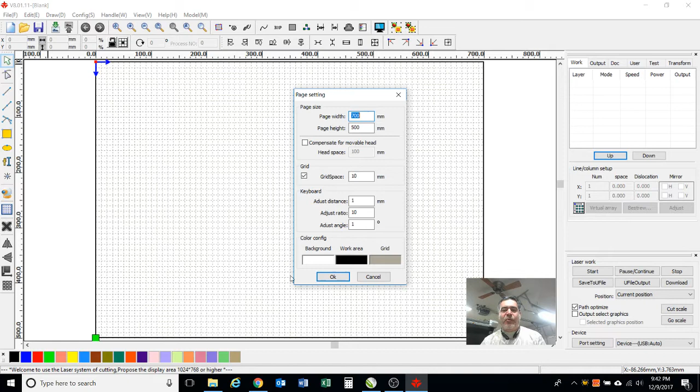Then we're going to go to file parameter settings. Here, DXF units, we're going to change those to inches, and we're going to change the unit type to inches as well. Click OK. Now I can see that the 700 wide is roughly...

What is that? A little bit more than 27 and a half, less than 27 and 3/4, so we're right in between there. My work, I don't see where I'll be using anything more than 24 inches wide, but at least I can set up parameters up to 27 and a half.

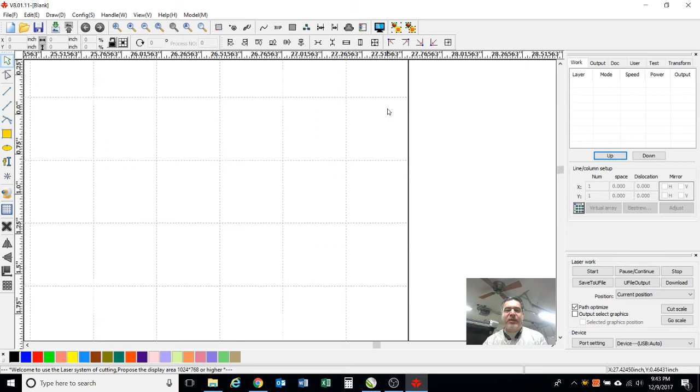Coming down here, all I'm doing is turning my little wheel on my mouse. So we're not quite at 19, not quite at 20, we're close to 19.75. Let's say 19 and a half, just to make things easy for us to work with.

Now this green box, that's when a unit or an item is done. I'm just going to draw a box right here. Let's say this is to cut out a piece of board, and it's going to start there, come down, across, up and over, and stop there once it's finished. That's good there, because then I can basically pull out my board from the front, and I'm not going to hit the laser head.

Now, I believe that's something I changed in the beginning. I think it's under system settings, and there's the laser head. If you put it in the center, when it's done doing its cut, it's going to go from here, corner, cut, cut, cut, cut, and then move there. Then you have to move the head out of the way in order to pull that board out.

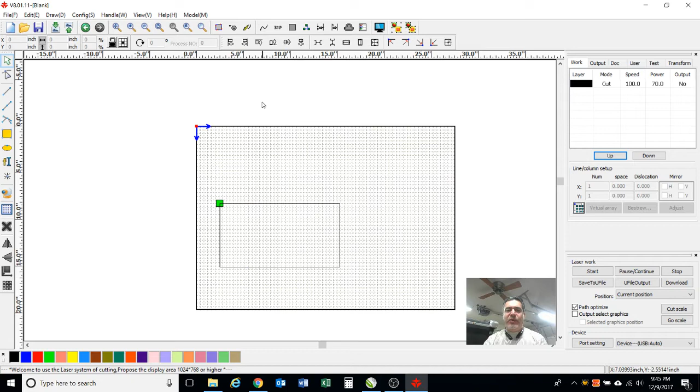So once you're done, it's good to have the head get out of the way so you can pull out your material. I'm going to put that back where I had it. So close—so basically we went from millimeters to inches. I gave you a little description of what this is, so now we're going to get rid of that.

Delete. Okay, now I'm going to show you some other pointers if you're going in from Corel to RDWorks. So we're in CorelDraw now, and what we're going to do is change a couple of items.

Right now it's telling me my board is 20 by 20, so let's go 27.5, and then we're basically 19 and a half. There, that is pretty much a view of our work area. Now this here is called the nudge factor—it's set real low, I'm going to do basically 1 inch.

And this is offsets. We're going to go to 0 to 0. Now basically that's the way I work with that particular setting.

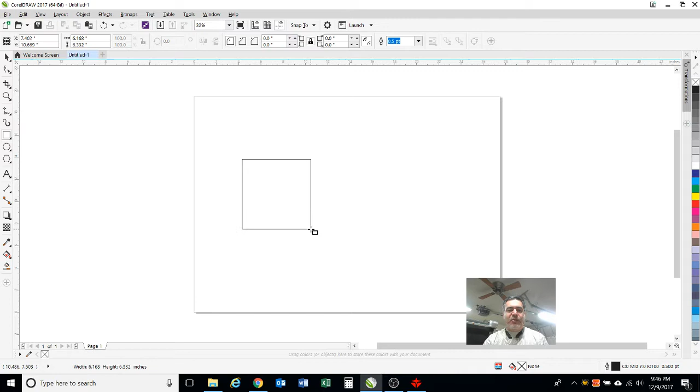Now we're going to do a box. Let's say you draw a box anywhere and it's here. If you hit P, that puts it in the center of your work area. Okay, we draw a circle, and actually that's an ellipse. I'm turning my wheel to zoom out a little bit, and I'm gonna hit P. So now we're in the center.

Now with the nudge factor that I did earlier, if I select an item, it moves over 1 inch, and there's another inch, and that makes it real easy to move stuff around. If you need one there, I'll hit Control D to duplicate, and that's 1 inch over, and that's another inch over. This comes in real handy when we're actually working with scaled items.

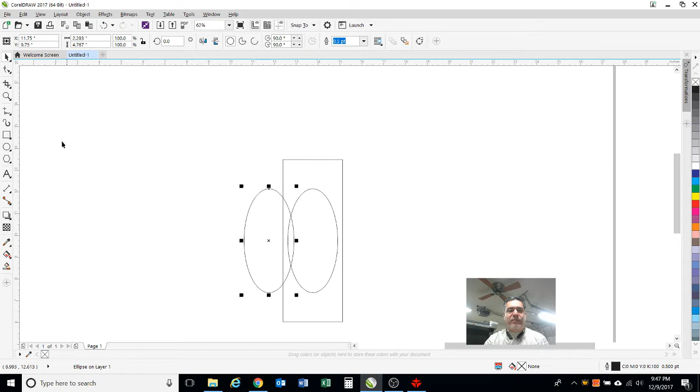So what I'm going to do now is get rid of that. I just left click, delete everything. We're going to create a box. If you hit your control button and your left button, that makes a perfectly square box. Now if I let go of the control button, I can make a rectangle. So I'm going to hit control, there we go.

Now let's say, for example, you can see where the numbers up here are changing while I move that around. That's actually telling me the size of that box. So you can see where it's changing. Let's go with a 2-inch box, and 2 again. I didn't have to hit both of them. I could have done it with just one, because this little lock is there. One can be 2 and the other one can be 3, and then I've got a rectangle.

So we're going to undo, and let's lock that in place. Now whatever I do here happens on the other one. So if I do a 3, it automatically does 3 on the other one. Okay, let's go back to a 2. We're going to go to 2, enter, and now we're off center of the page.

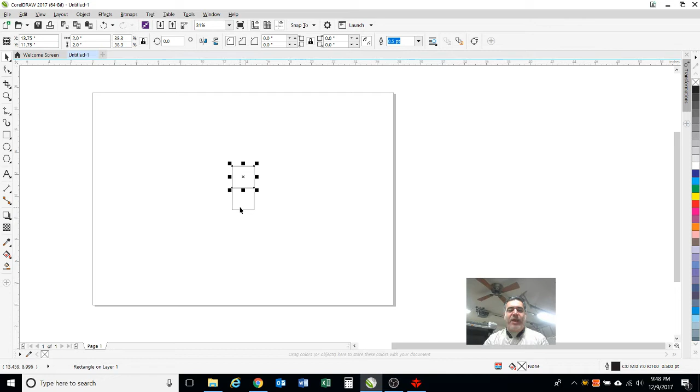So we're going to hit P, and there it is. With that 1 inch nudge factor, I'm going to select Control D and move up. That's halfway. Move up again. Now I'm just going to hit enter, and there we go. If we zoom in, we're perfectly aligned right on top of the edge of the other one.

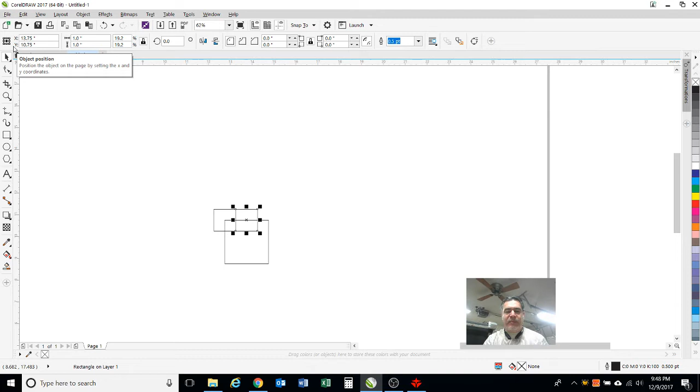So if we made that a 1 inch box, enter, hit P, move up and up, there. Now Control D, Control D, and we can move around and hit right where we need to be. Control D. That's just showing you some little steps for now, but the real thing I want to show you is the different boxes.

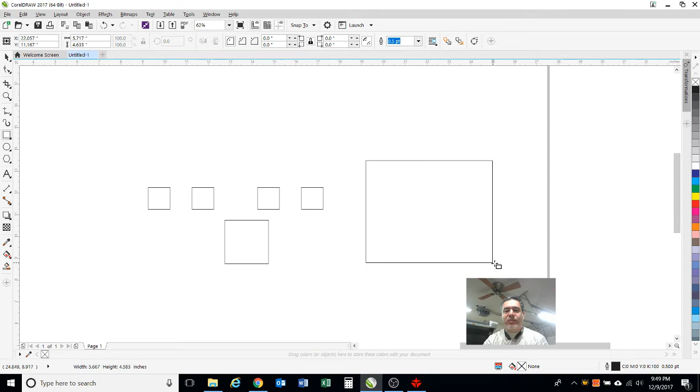Now these boxes are actually hollow boxes, and the way I'm going to show you that is I create a box, and if I move this here or create that box, fill the box. Now if I drag one of these boxes over, it's going to disappear because this box is on top, because as you draw it stacks stuff on the page. So we're going to make that blue box an item on the back of the page. So now you can see that the box we created earlier, you can see through it. You can see the color. This one, all you're seeing is the outline of the box.

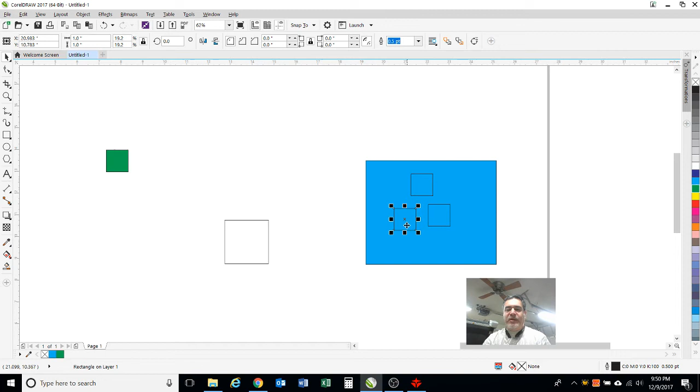Now we're going to select this one here and give it a green color. We'll grab this box and give it a red color. We'll grab this box and give it an orange color. This box here, we're just going to leave it as is, black. We're getting rid of that one, and we're getting rid of that one.

Now what I'm trying to point out is if we zoom in, you can see that there's a black outline on each one of these boxes, and this is a hollow box with the black outline. You have to be careful when you go into RDWorks because it sees that black, and if you have this black selected as a cutout, it will cut through the wood. You may want this one to be at 10% power, 30% power, and 50% power, which is light, a little darker, and a little darker. But as soon as it comes to this black, it's going to cut them out and these pieces will fall out.

The way you get rid of these outlines is you select, and up here is the little pen. Everything should be what's called hairline, so any outlines you want to be a hairline. This is now a very fine hairline, but we don't want any black on the outside of these boxes, so you go from hairline to none. Now we just have a color box with no black outline.

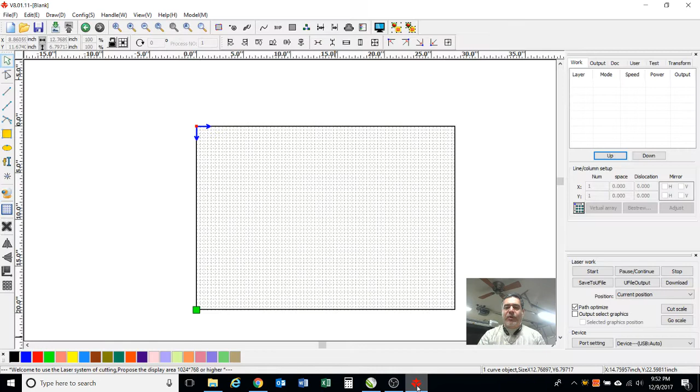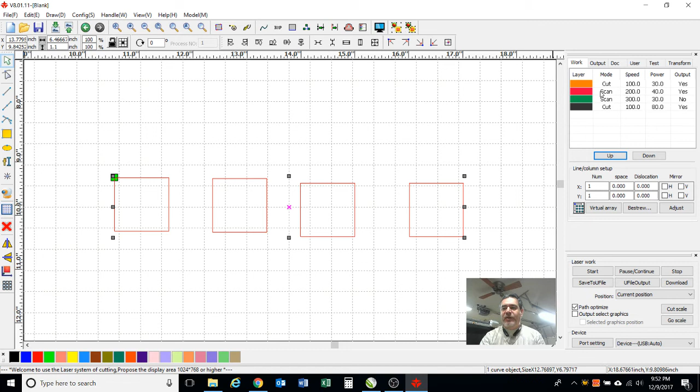Now let's go into RDWorks. In RDWorks, what we're going to do is import the DXF file, so we go back into my test folder, and I have one called box. You can kind of see the three different colors we're opening. Right now they're all red because they're selected, but over here on the side you can see the different color boxes. If you click anywhere on the screen, now you've got your individual colors.

A cut is actually going to cut, and I haven't done it where it's a fill-in. So what I do when something's filled in, I do a scan. You double click on the item, and we're going to change that to a scan. Speed we can leave at that, but we're just going to go by 10 power. I don't know what that's for, and then leave this one at 10 as well. Let OK. So you can see here we're at scan, 100 speed, at 10% power, and then you can increase the speed and go to a more powerful setting.

Let's say 200 speed and 30 power, and scan as well, which is good. This is going to be another scan because these are filled-in boxes. The last one was 30, so we'll make this a 300 speed, and then 50 power, and click OK.

Then this will be a cutout. Let's say you got a piece of quarter-inch paneling, which is what I've been cutting out ornaments and stuff from. I go at basically 7 millimeters a second, and I go at a power of 80, and that cuts that paneling perfect.

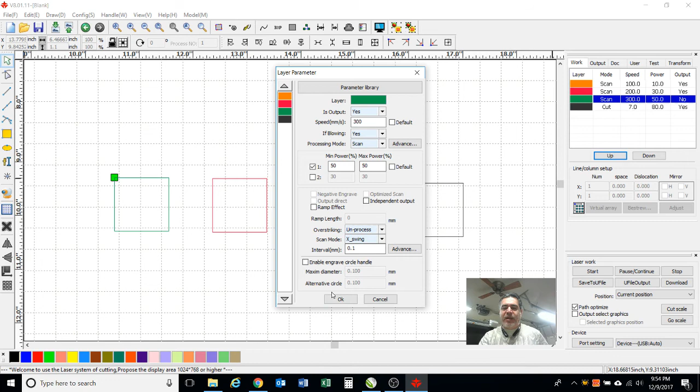Now you can actually also move these the way you want. I always save my cutouts for last, so I go from low power to high power to cutout, and that basically takes care of it.

It'd be 100 speed at 10 power, 200 speed at 30 power, this would be 300 speed at 50 power, and then you've got slow speed at 7 millimeters per second at 80% power.

So then what you do is basically you would save this to a U file, and you basically slide in your USB. I'm just going to put it onto the spot where we have our test box, so we go to box. Now there we go.

Let's say this is a work file that you wanted to come back and work on. What we just did, we saved it to a U file. That's actually what goes to the machine. But if you want to make modifications to this file later on, you actually have to save it as a work file. So you save as, and here's our spot, and we go to box.

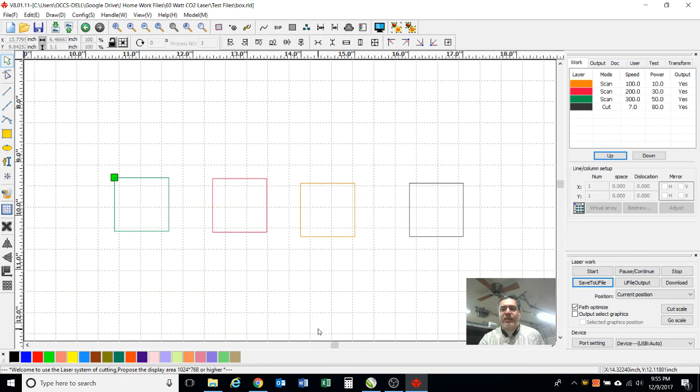Okay, save. So let's say, for example, we close this out. I'm going to minimize CorelDraw, go to my Windows Explorer. Let's go into, okay, so now we're going to have separate files here. Let's change the view to details, and we had box, and here's the DXF that we exported from CorelDraw.

This RD file is what actually goes into the machine to burn, cut, or engrave, and then this is the one that you actually use in RDWorks. So we're going to minimize and load RDWorks back up.

Okay, now if we want to open it, open, and here's your RLD file. Open, and there we go. And then you can add more, draw, whatever else.

This is very basic right now, just to see if this helps you out at all. I guess that's it for now. You take care.